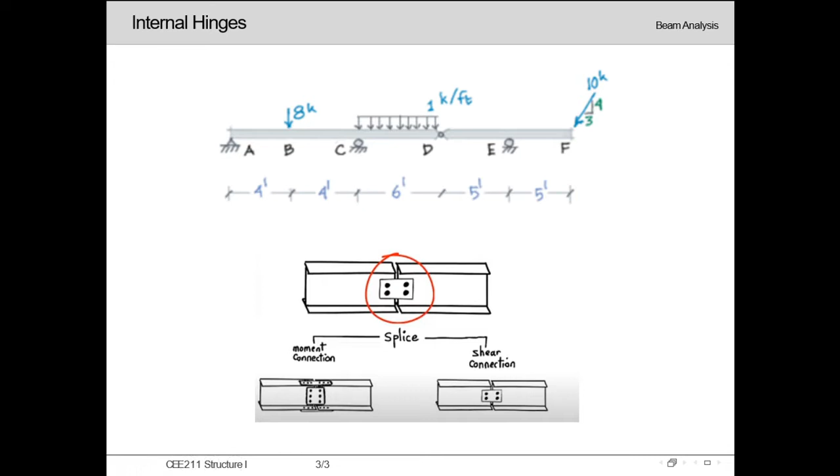So the extension of the beam reaction lecture is internal hinges. Basically, the use of internal hinges is to convert an indeterminate structure to a determinate one. Here we can see, if we consider the total beam, this would be considered an indeterminate structure, but as we have introduced a hinge over here, it is converting the total structure to a determinate one.

So the function of a hinge is to divide the entire structure into two parts at the point on which it is present. Here we can see an internal hinge at point D. So at point D, the entire beam AF will be divided into two segments. One segment will be AD and the other segment will be DF.

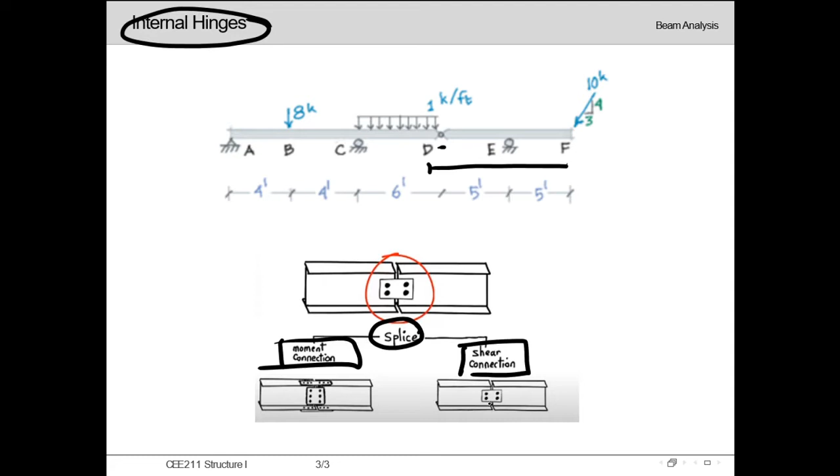The other name of hinge is splice. This hinge connection could be of two types. One is shear connection and another one is moment connection. So what is the use of shear connection? Shear connection connects two segments sidewise, and the moment connection connects two segments sidewise, and they are also connected from the top and bottom portion. Here we can see the example of moment connection and shear connection.

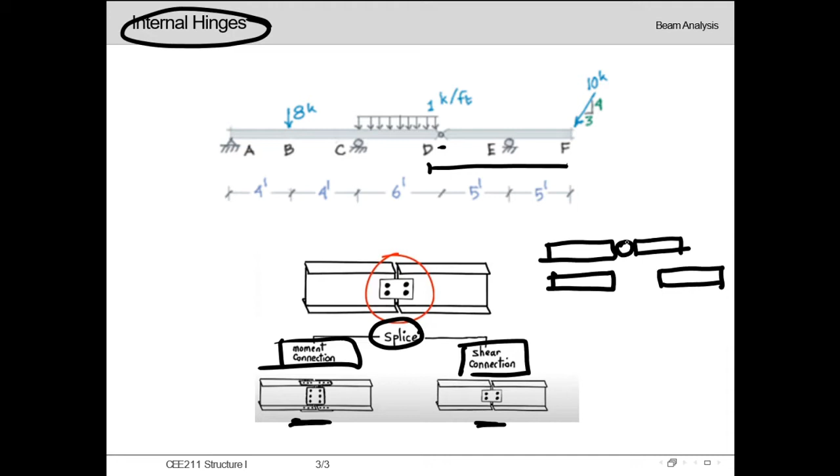So when a shear connection, or a hinge of shear connection, is used, it connects two beams. Here is an example of two beams that have been connected. So the main function of it is to divide the beam into two segments. So it will be divided into two segments, and this is a shear connection. If it were a moment connection, then it would have been connected from top and bottom also.

So when this is a shear connection, when we are dividing the beam into two segments, a vertical reaction and a horizontal reaction will arise in both segments. As we have considered a downward vertical reaction for the left segment, we need to consider an upward vertical reaction for the right segment. As we have considered a rightward horizontal reaction for the left segment, we need to consider a leftward horizontal reaction for the right segment.

So for the right segment, we are considering a leftward horizontal reaction and an upward vertical reaction, and for the left segment, we are considering a rightward horizontal reaction and a downward vertical reaction. So in total, we can see that these vertical reactions are cancelling each other. That means one vertical reaction is acting downward and the other one is acting upward. These two values will remain the same.

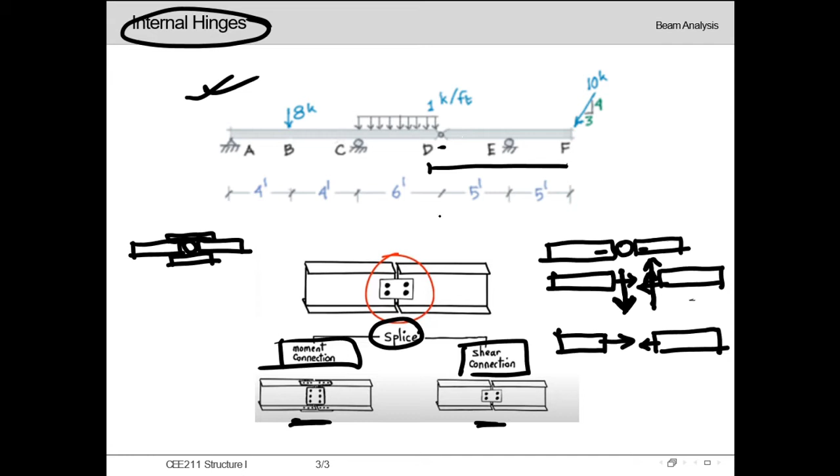Now let's see the example over here. It's given the AF beam, and a shear connection has been used at point D. So we can divide the entire beam into two segments. Before that, we need to simplify our loading patterns. We can see here a uniformly distributed load, 1 kip per foot, acting throughout a length of 6 feet. So the total load will be 1 times 6, which is 6 kip.

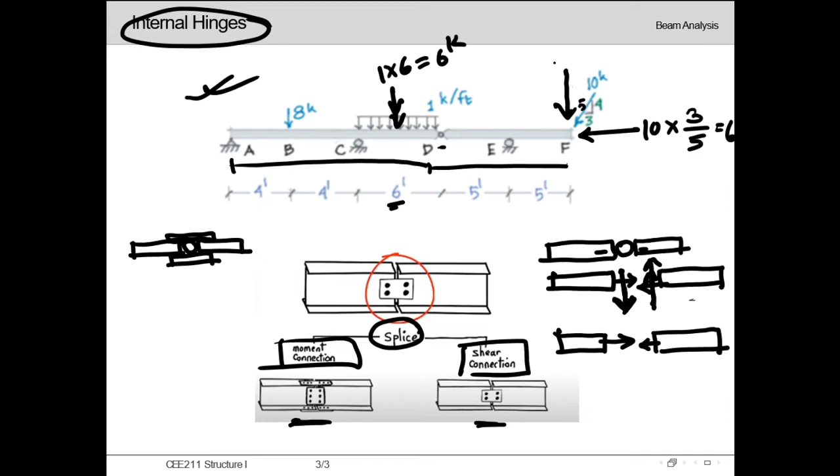And as this is an inclined load, this inclined load will have two components. The slope is 3, 4, so the hypotenuse will be 5. So the horizontal component will be 10 times 3 over 5, which is 6, and the vertical component will be 10 times 4 over 5. In total it will be 8.

So we have simplified our loadings. This is 6 and this is 8, and now we can cancel this inclined load. Now we need to divide it into two segments and start analyzing this beam in order to calculate the support reactions that will be occurring over here.

So let's draw the free body diagram. For this AD segment, at point A there is a pin support. This pin support will have two reactions, one vertical and one horizontal. Let's denote them AY and AX. At point C there is a roller support, so the reaction will be CY. For E there is a roller support, so there will be one reaction, which is EY.

Now for this hinge, in both segments reactions will occur similarly to what we had explained earlier. Let's see how to solve this problem. We have already divided the inclined load into two components, and then we are separating the two segments at point D.

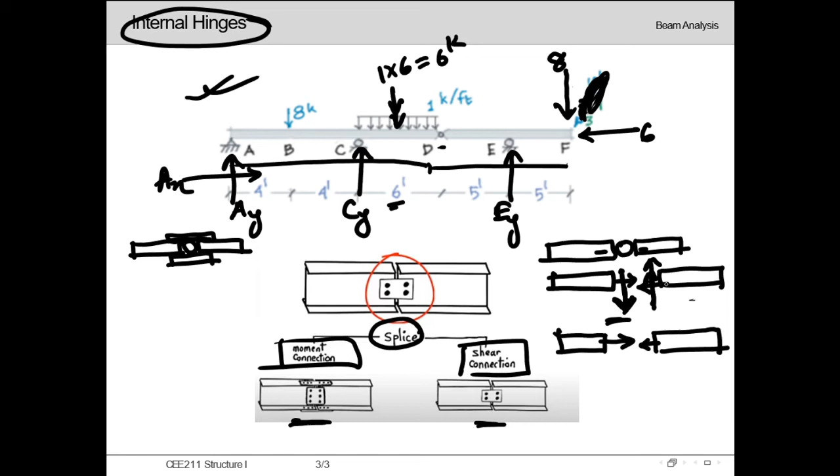One is DY. As we are taking the right segment, for the right segment we consider the vertical reaction upward and the horizontal reaction leftward. So we are doing the same thing here for the right segment: vertical reaction upward and horizontal reaction leftward. And similarly the same reactions will be carried to the left segment.

For the left segment, the vertical reaction will be downward DY, and the horizontal reaction is rightward DX, exactly opposite to the reactions we have considered for the right segment. So for the right segment, DY is upward, DX is leftward. For the left segment, it is opposite: DY downward and DX rightward.

Now we can see that the beam has already been divided into two segments. So we need to start with the simplified segment first. At the right segment we can see three unknown reactions, which are EY, DX and DY. So applying summation of Fx equal to 0, considering rightward positive.

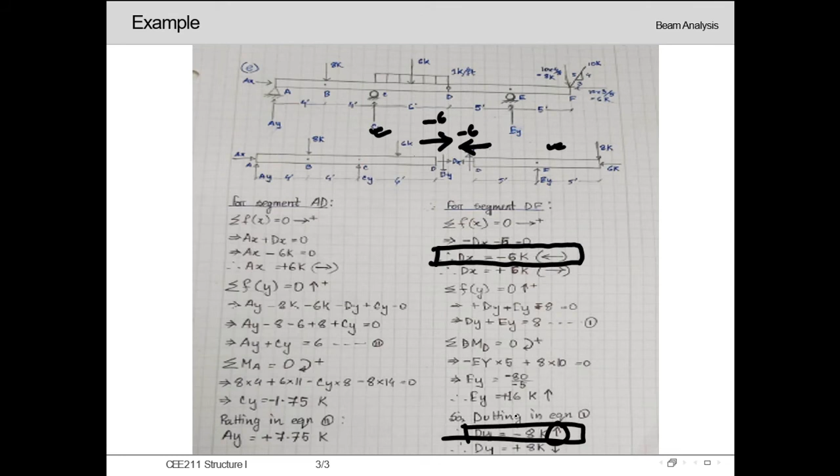We had already calculated the value of Dx as -6 kip, and it is acting leftward. So for this right segment, Dx is -6. So for the left segment, Dx will be acting in the opposite direction, and this value will be -6. And Dy is -8, acting upward over here. So for the left section it will be downward, and the value will remain the same, which is -8. So the direction is just opposite, and it will be carried to the next segment.

So now we will be dealing with the next segment, which is segment AD, applying summation of Fx equal to 0, considering rightward positive. The forces acting on this left segment are: Ax is acting rightward, so positive Ax. Are there any other forces in the x direction? Yes, Dx is acting rightward, so it is positive, and the value of Dx was -6. We plug the value of Dx over here, which is -6. So Ax minus 6 equals 0. From here we will get the value of Ax. So we have already calculated Ax, Dx and Dy, also Ey.

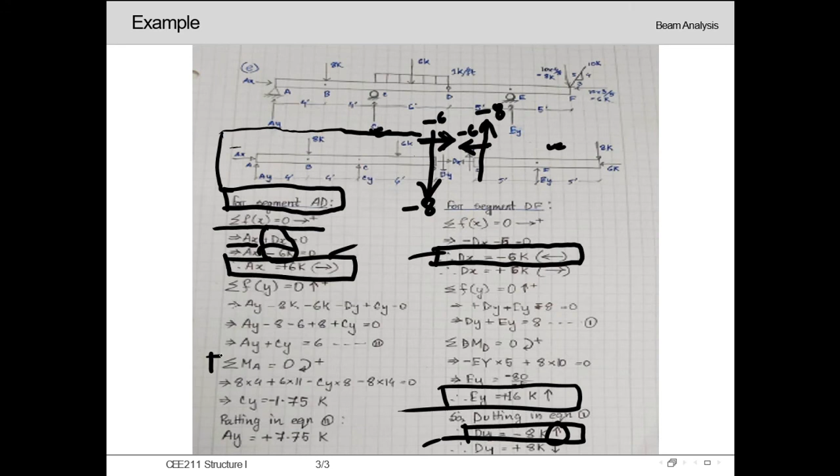Now applying summation of moment with respect to point A, the forces creating moment about point A are 8 kip, Cy, this 6 and this -8, which is Dy. Starting from the initial point, Ax and Ay will not give any moment, as we are taking moments about point A. 8 kip is acting downward, so it will create a moment in the clockwise direction. We have considered clockwise as positive, so +8, and the moment arm is 4, as the distance is 4 feet.

Then Cy is acting upward, creating a moment in the anti-clockwise direction, so we have taken -Cy, and the distance is 4 plus 4, which is 8. Now 6 kip is acting downward, creating a moment in the clockwise direction, and the moment arm is 4 plus 4 plus half of 6, which is 3 feet. So 4 plus 4 plus 3 is 11, so +6 times 11. Then Dy is -8, giving a moment in the clockwise direction, so it will be -8 times 14. This minus sign is not for the direction, it is for the value, as the total distance is 4 plus 4 plus 6, which is 14. From here we get the value of Cy as -1.75.